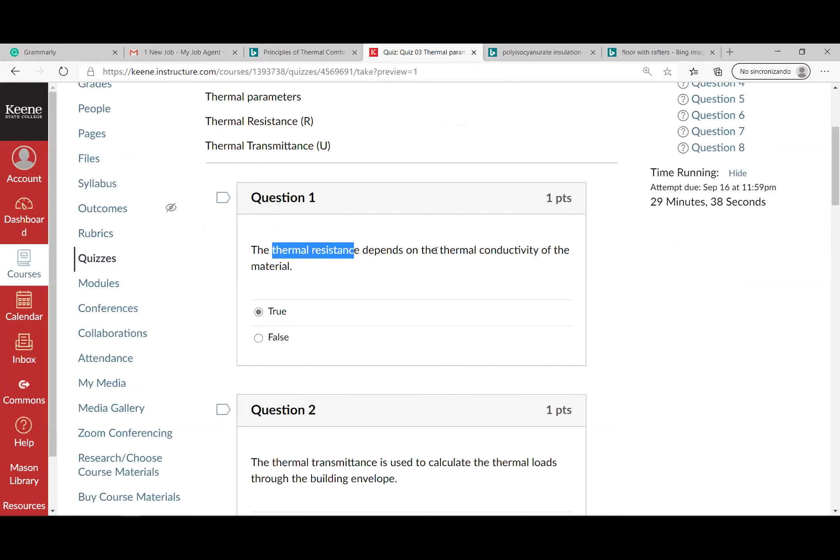Going over the quiz on thermal parameters. Okay, so let me look at it and we will solve all the questions. So first, question 1. The thermal resistance depends on the thermal conductivity of the material. Well, that's true. There's nothing to say about this. The thermal resistance depends on the thermal conductivity, and it depends on the thickness or the width of the material, but it depends on thermal conductivity.

Second, the thermal transmittance is used to calculate the thermal loads through the building envelope. Yes, so we use thermal transmittance, the U value, so that's true. Question 3. So here you have to type

Can you hear me, by the way? Yes. Yep, we can hear you. Okay. Rebecca, what's wrong? Or Scott, you can't hear? Okay, you fixed it? Yeah, probably there's something wrong with your computer. If you can't hear me, it's because you have muted your speakers or whatever, because my system is working. Okay, I'll continue.

Then here you are supposed to type a number. So if the thermal conductivity of a material is 5 BTU inches per hour Fahrenheit square feet, and the thickness of the material is 5 inches, the thermal resistance is, well, that's very straightforward because this is the thickness 5 divided by 5. So here you should type 1.

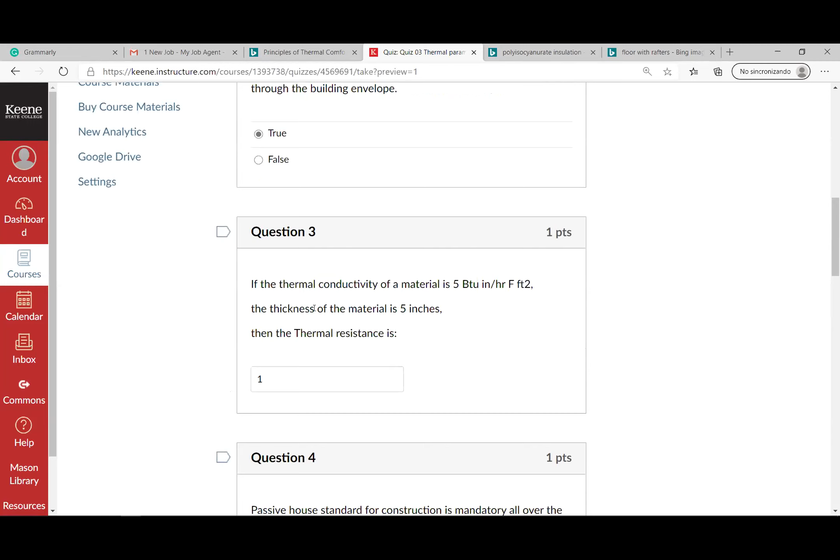And I think this is the question. Some of you might have, yeah, and that was my mistake, because for the thermal resistance, I think I should have added the units, but I added only the value itself. But next time I will add the units, okay? But here you just have to divide 5 by 5, so it's 1.

Question 4. Passive house standards for construction are mandatory all over the United States. Well, this is false. It's not mandatory. It's recommended, especially in cold areas of the United States, this is the recommended standard. But it's not mandatory. Okay, so there are things that are mandatory, there are things that are recommended. But we have to make our decisions.

So there are federal laws, the things that are mandatory all over the United States. Then there are state laws, things that apply only to the state we are living in. And then there are things that are not mandatory. They are recommended good practices of construction. And the passive house standards are one of the recommended things.

If I had to make a guess, I would say that in 10 years, that would be mandatory in cold areas of the States. I think passive house doesn't make any sense in Florida or in South California, so there should be other standards for those areas. But in cold areas, in north or northeast or northwest areas of the country, I think it makes sense.

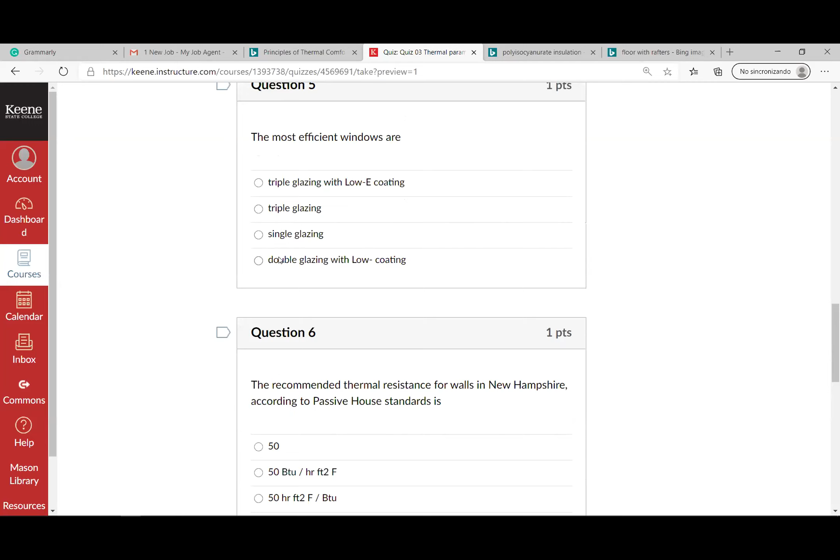Then the most efficient windows are, here we have triple glazing. Single glazing is not. Double glazing is not the most efficient one. So triple glazing with low emissivity coating is the right answer. What is the best one or the most efficient one between triple glazing and double glazing with low

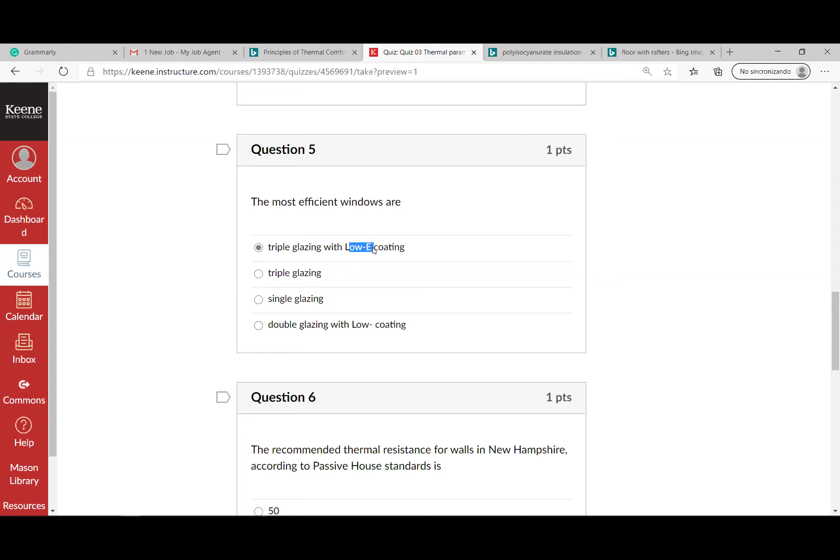emissivity coating? Well, I don't know. I need more information, but with this information, this is the most efficient one. Triple glazing is always better than double. And low E coating is better than not having a low E coating, low emissivity coating.

Then question 6, the recommended thermal resistance for walls in New Hampshire, according to Passive House standards, is 50, but then we need the units, okay? So the units for thermal resistance are this one. It's 50 hours square feet Fahrenheit divided by BTU. Okay, so 50 is not enough. It's not the correct answer.

And then which thermal insulation has the best thermal conductivity? When we're talking about the best thermal conductivity, we're talking about the lowest thermal conductivity. So in terms of thermal conductivity, extruded polystyrene is the best because it has the lowest thermal conductivity. Then there are other aspects like the life cycle, the CO2 emissions, and there might be other options. But if we only look at the thermal conductivity, extruded polystyrene is the best one.

Then what is the thermal envelope of a building? So here we have different definitions. Is it the area of a building between the basement and the attic? No.

No, it's not correct. It might be. So if you look at this, yeah. So sometimes it is the area of the building between the basement and the attic, if we don't have thermal insulation in the basement and we don't have thermal insulation in the attic. But if we do have thermal insulation either in the basement or the attic, this is not correct.

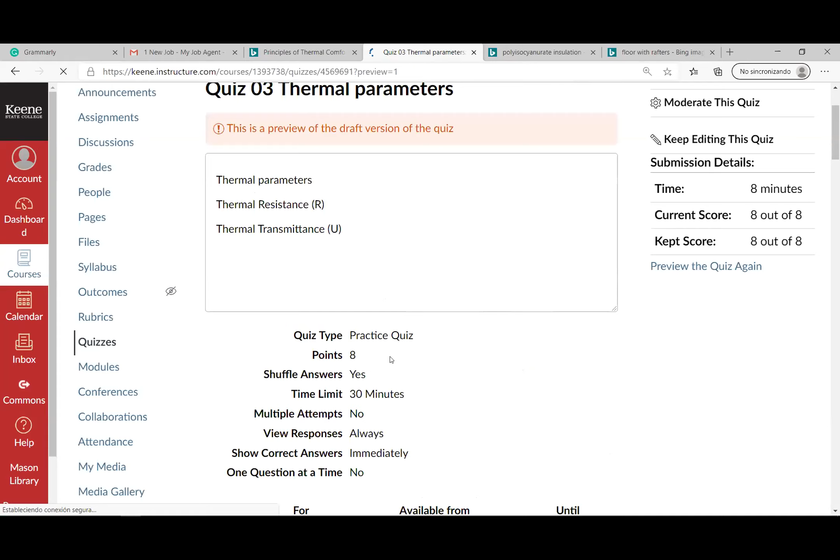So that's correct. So if I submit this, correct? Yes, okay. Everything's correct. So make sure that you submit all those quizzes. It's very straightforward, and if you make the wrong choice, you have feedback with the correct answer. It's just another way to take the attendance. You have to attend the lesson, and at the same time, you have to complete the quiz.

Okay, so Cyrus, are you there? Yeah, I'm here. Okay, let me.

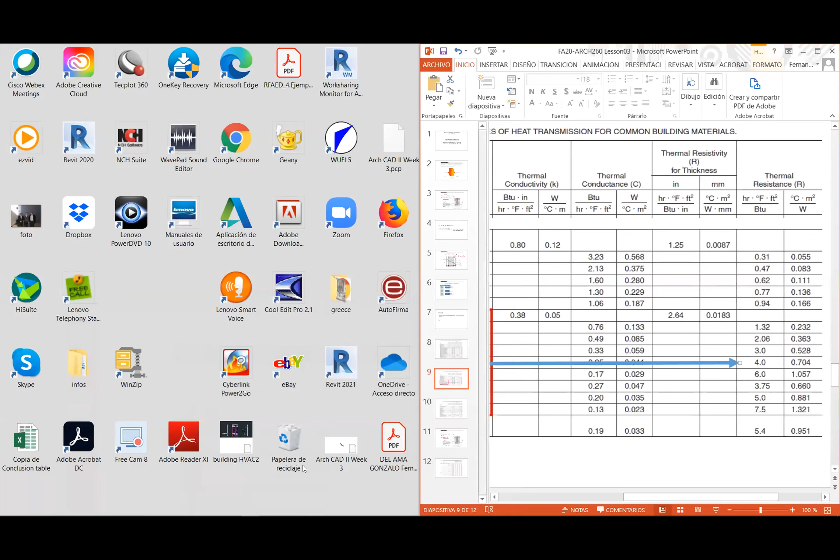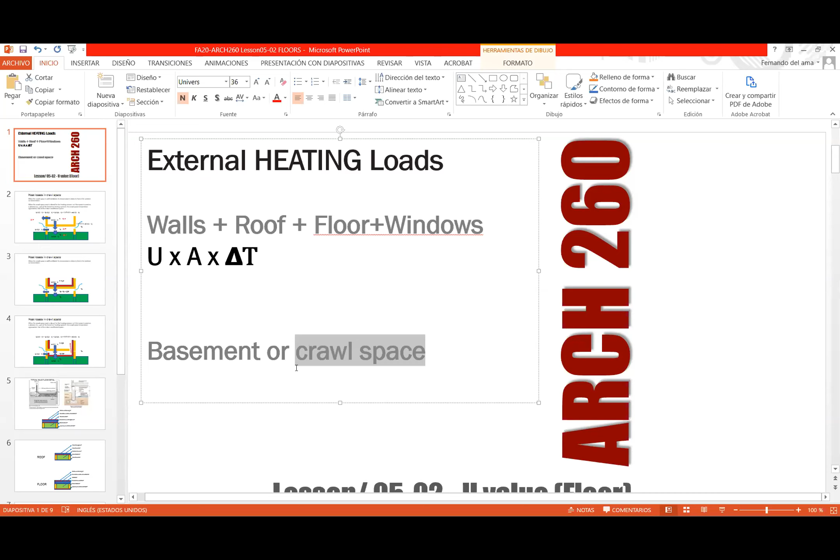Okay, so let's go over today's lesson. Today we're going to talk about heating loads. Finally we're going to calculate the heating load, which is the U value, times the area of the element, which can be a wall, a roof, floor, windows, whatever, times indoor minus outdoor temperature. Today we are going to look at floors, because floors are special, and we can have either a basement or a crawl space, or neither of them. So there are different options for floors. Let's start studying the options.

In single family houses, I think 90% of single family houses in the United States have either a basement or a crawl space. Basements are different because a basement is like another room. Usually we have basements with storage or mechanical rooms, so it's not a conditioned space. It doesn't have heating or cooling systems, but it's a place where people can stay. A crawl space is a very low space, like 2-3 feet, so people cannot stand in it.

And why do we need this? There are different functions. First, the crawl space provides us with protection from the ground, from the soil. In the soil we have a lot of things. We can have a rock soil, which is the best one, but even in rock soils we have moisture. For sure there will be moisture if it rains; the rain is filtered through the soil. We have animals, bugs, plants. So there might be a lot of things in the soil, and this is something that human beings have done throughout history.

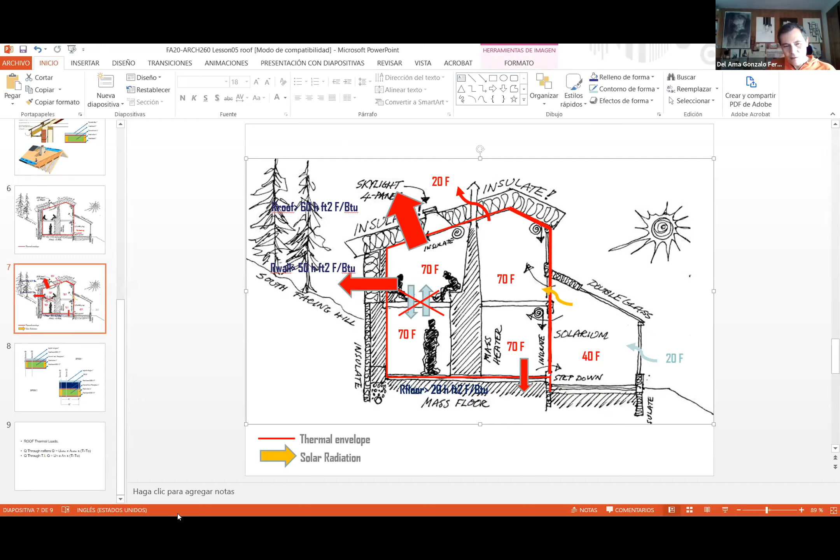But here, we can either place thermal insulation here, and this is the thermal envelope. You remember that we explained what the thermal envelope was. So in this case, if this place has a temperature of 40 Fahrenheit, that means that it's not a living room, so people are not living here. So the thermal envelope is this, and I have to place my thermal insulation where the thermal envelope is. So in this example, the thermal envelope is here. I have thermal insulation in the wall, and I have thermal insulation here in this floor.

And then I assume that the crawl space has the same temperature as outdoors, 20 Fahrenheit. Maybe this is not true. Maybe the temperature here is not 20, it can be 30, 35, 40. So we are overestimating the heat loss, because the thermal load here is the U value of this floor times the area of the floor times indoor minus outdoor temperature, 70 minus 20. So I know that it's going to be less. It's not going to be 70 minus 20. Probably it's going to be 70 minus 40 or 35. But I'm on the safe side.

So I know that my client won't have any trouble heating up that space, because I have overestimated the heat losses. So that's fine. If I want to be accurate and don't want to overestimate anything, let's solve this equation. But if I make that assumption, the thermal loads most likely will be lower than my calculations, so my clients will be comfortable there. We can either do this. This is what I recommend. I recommend you use thermal insulation here inside the house, because look, we have continuous thermal insulation, and this is always good.

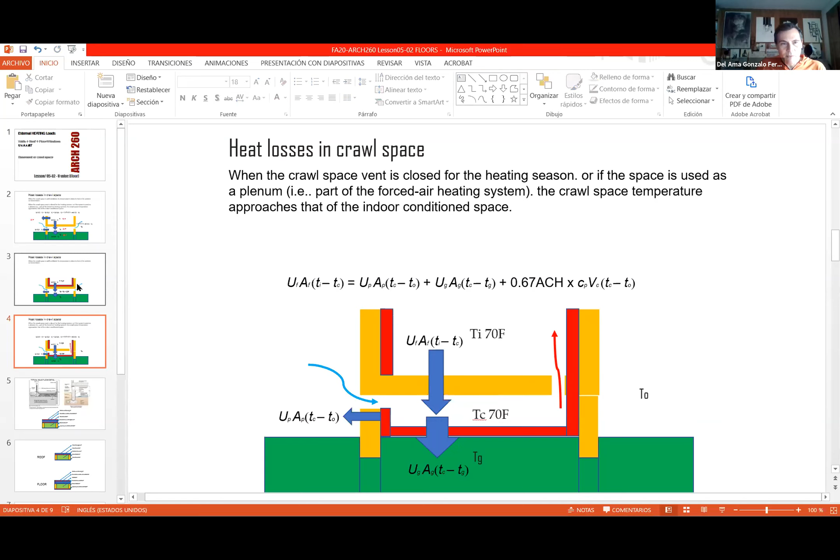Does it make sense? I don't think so. But there might be some times in which it can be reasonable. Anyway, this is my recommendation, but it doesn't mean that this is the truth and nothing but the truth. There might be other options, other solutions. So listen to other solutions or opinions. If it's reasonable, you can accept them. If it's not reasonable, go ahead with your own criteria. So we're going to do this because I'm teaching this course. I will use this option that I think is a good one. If it's not the best, I think it's good enough.

So that simplifies things a lot, because if I want to quantify the thermal losses here, I need to calculate the U value of the floor. We know how to do that. I need to measure the floor area. It's very easy. And then I only need to know the indoor minus outdoor temperature. So I don't need to calculate that crawl space.

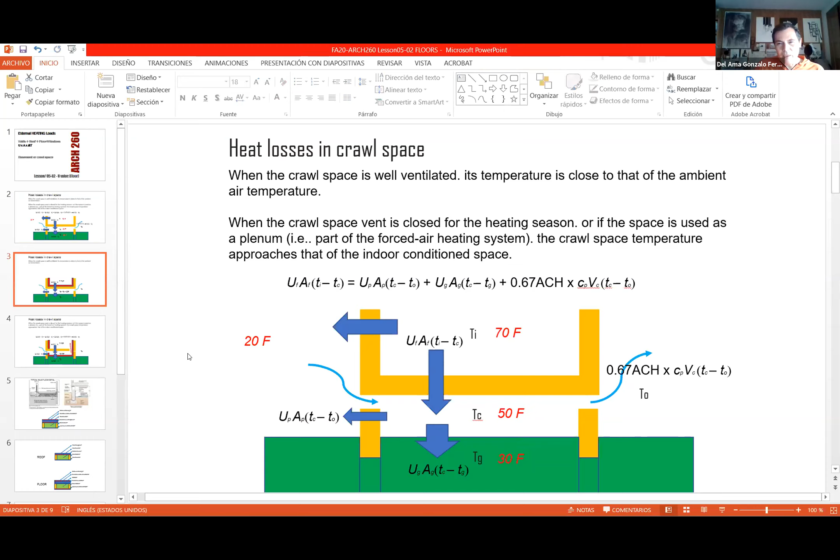With this equation, I need to calculate the crawl space, and I need to know the ground or the soil temperature. It's more complicated. Probably it's more accurate, but it's more complicated. And I think this assumption is good enough because we are on the safe side, because we are overestimating the heating loads.

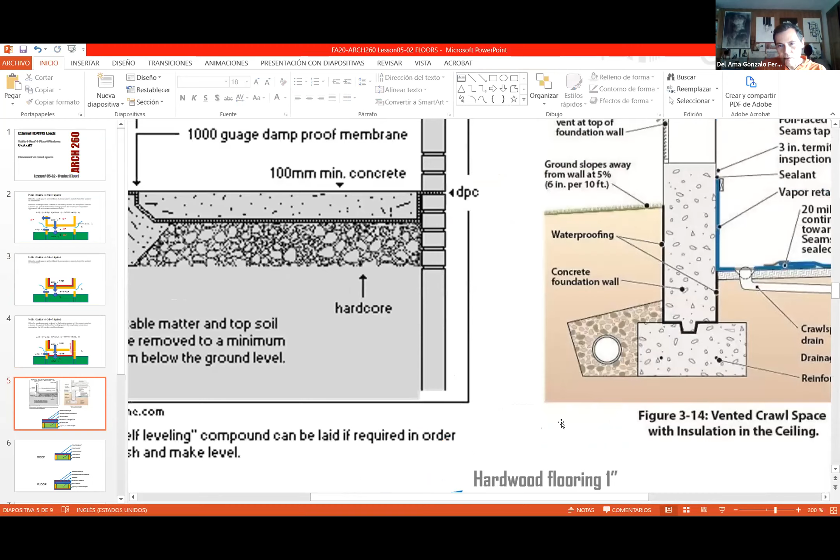Okay, so now we have to analyze details. So if you remember, there was a book I recommended, one of the recommended books in this course. It's the Builder's Guide to Cold Climates. So this detail is taken from that book. So this is the book. And if you look over that book, you will find that there are a lot of details, like this one,

with crawl space. And it's very useful because here we are analyzing only materials from the thermal point of view. But in this book, you will find that there are other aspects of building construction that we are not analyzing in this course, like waterproof layers, or how we deal with moisture. So we will learn this in other courses, especially in Building Science 2. But in this course, we're only dealing with thermal transmittance, thermal resistance, thermal conductivity, the thermal aspects of those buildings.

But I think it's good going over those details, because there are a lot of details here, and if you find those details in that book, that means that they are good details that you can use. You can copy and you can use. Okay. So I think it's good having this book, because there are things. Look at this detail. There is a lot of information here.

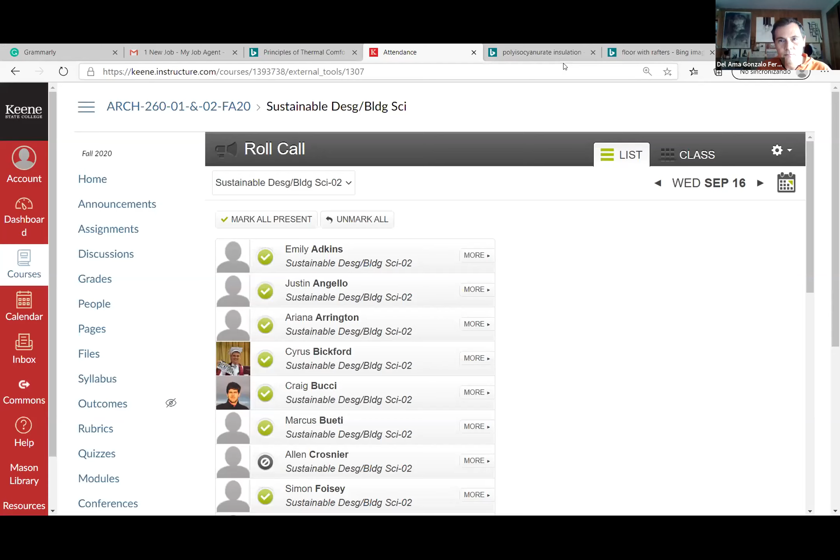But here, this material, this polyisocyanurate, okay, this is a waterproof material. This is a thermal insulating waterproof material. So if we Google this, okay, this is the polyisocyanurate insulation. Well, it's foam. It's a rigid foam board insulation, and well, it's something that can cope with water. Okay, so it's something that doesn't get wet inside because it has a

closed cell rigid foam. I don't know if you have studied chemistry. If you haven't, it's something amazing. But this closed cell foam or polymer means that we have cells like this. So we have atoms of materials creating those closed cells. And if it's closed, that means that a molecule of water cannot enter inside this closed cell. Okay, so the material itself is protected against water.

If we have an open cell material, that means that water can flow through that material, so it doesn't protect the house against water. Okay, so when we want to protect something against water, we can use this foam, and foam is better than fiberglass or fiberboard. Those are not closed cell materials. So if we really want to protect things against water, we have to use this foam. But we can have an open cell foam or a closed cell foam. So we can use that, and that's it.

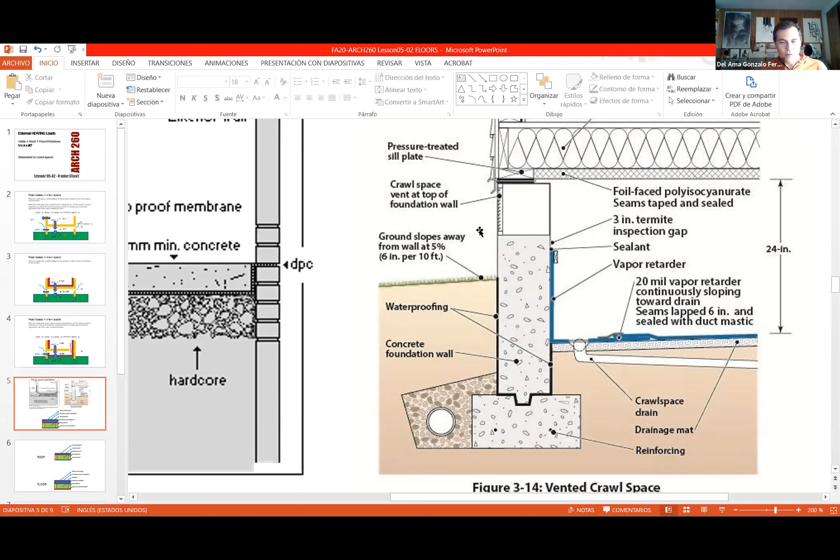And with that book, you will learn not only things we are studying now. We're studying the thermal properties of materials, because this drain doesn't have to do with thermal properties of materials. This is to get rid of water. Yeah, we have to do that, but this is not building science. This is construction. Okay, so with that book, you can learn building science, and you can learn good construction solutions or details.

Okay, so let's look at these two details. Here we have the crawl space, and here we have a floor without the crawl space. Is it acceptable? You might find people that think that this is a good solution. Well, I wouldn't do that in living spaces. Okay, if we have a house with a living room and a bedroom, or we have a commercial shop, or a theater, or other commercial buildings, I wouldn't do this where people can stand.

I can do that, for example, in carports. So in carports, I don't need a crawl space, because there will be a car here, there won't be people, so we don't need comfort conditions where the car is, or a storage room, or a mechanical room. Okay, so if I have rooms where people are not living, I would go for this solution because it's cheaper.

And we have a waterproof layer here. So if we protect this, we won't have issues with water. Here we have aggregates. Okay, so this is a concrete slab, and here we have aggregates. Aggregates have a function; we will explain that in another class, maybe not today. But this is a good detail with aggregates, a waterproof layer, and then a concrete slab.

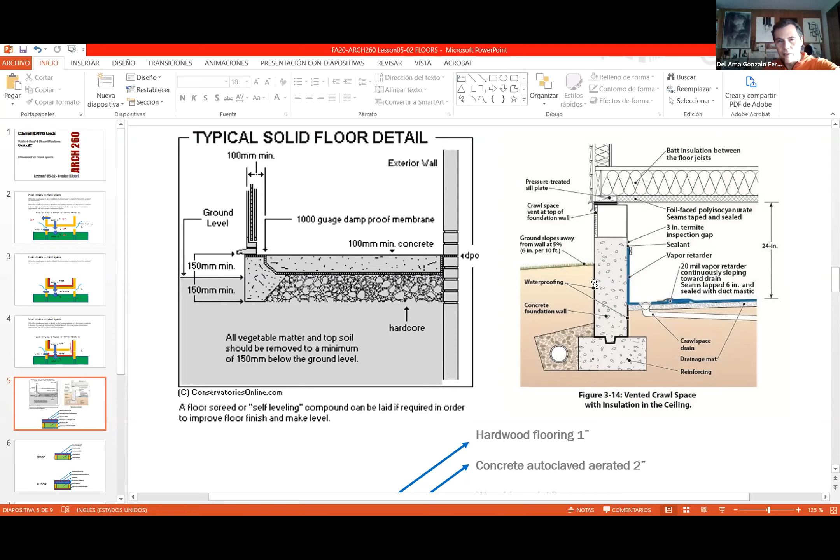We would have a wall, a concrete wall. If we have a basement, most likely we will have something like that. We'll have the aggregates and another concrete slab here. So here we have directly the soil. We don't have another concrete slab there. Okay, so I recommend you this detail.

And then if we analyze the materials, thicknesses and different layers that we have in a floor, this can be something good. In this kind of construction, there will be rafters and thermal insulation in the middle, the same thing we saw last Monday on roofs. In the roof we have rafters, the structural elements, and then thermal insulation. In the floor, we will have the same structure: rafters, 2x4 or 2x6, 16 inches apart. The width of the rafter is 2, so 14 between the faces of two rafters. Those dimensions are standard.

But the difference is that this is outdoors. So we have to use this polyisocyanurate board, let's say 3/4 of an inch, because we need to protect this from moisture and water. This is not an OSB board or plywood. It has to be polyisocyanurate because it needs to be waterproof. Then we have rafters and thermal insulation, let's say fiberglass. And then we can have a wood board, let's say OSB. 1 inch is too much; let's say half inch.

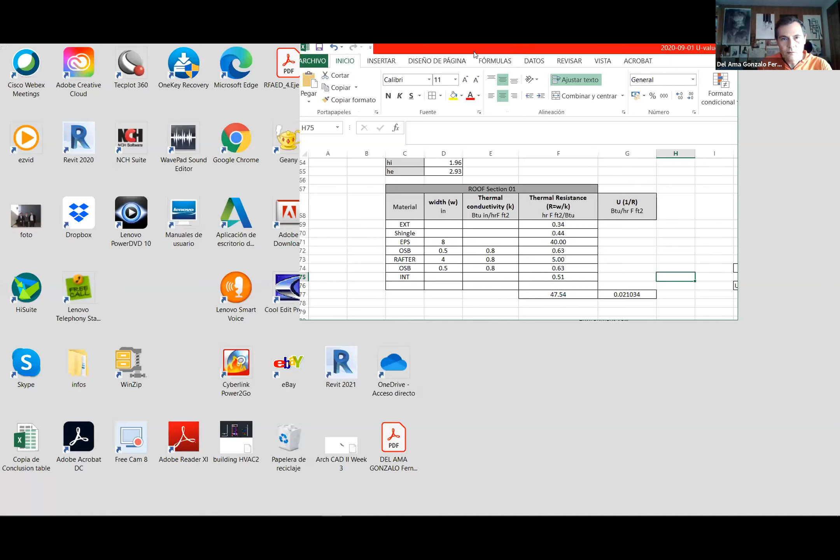But we do have 2 different sections. We have a section through the rafter, and we have another section through the thermal insulating, in this case fiberglass. So we are going to calculate this. I will place this here, and I'm going to open the Excel file. There we go. And this is the roof. This is the floor. Okay. So I'm going to delete this.

Well, the most important thing is that you have already worked with this Excel file, and we'll keep on using this file to carry out the final energy analysis of a building. Okay, so what we are going to do now, I'm going to copy section 1 and section 2. So I select this, I copy, then I paste it. And this is not a roof, this is a floor. Section 1 through the rafters, okay? And then there's another floor here. Section 2 through the fiberglass.

Okay, so now we have to change materials. So the first thing, if we are analyzing floors, we have to be careful because this is inside and this is outside. In these tables, we have placed the exterior at the top of the table. This is good for roofs because in roofs, this is what happens. But in floors, I would do the other way around. So this is ext and this is in, because here we are inside and we go down and we are outside. So I think this is clear.

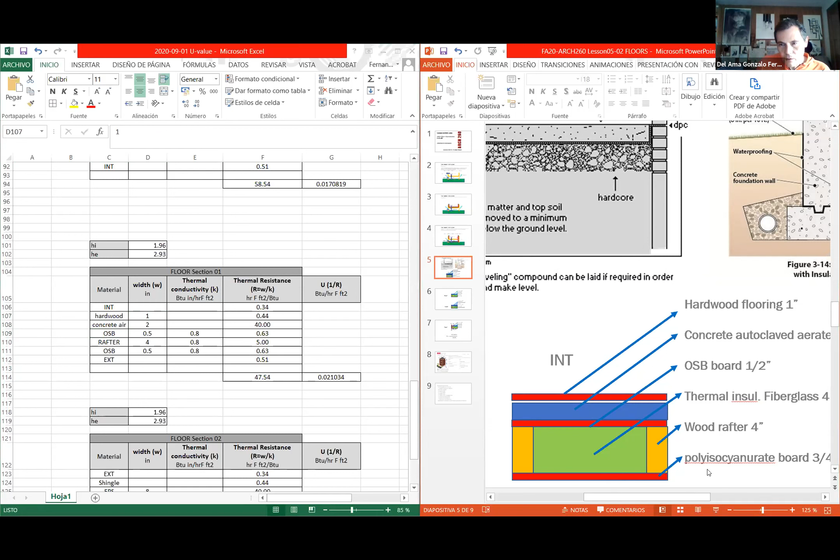This concrete, yeah, it's 2 inches here. Then we have the OSB, ½ inch. And then we have a rafter, and the rafter is 4 inches. So it's the same thing we had for the roof. But now we don't have another OSB.

So this is the polyiso, whatever. Yeah. And this is 3 quarters. So the thickness is 0.75. It's 3 quarters. Okay, so we have materials, and then we have the width.

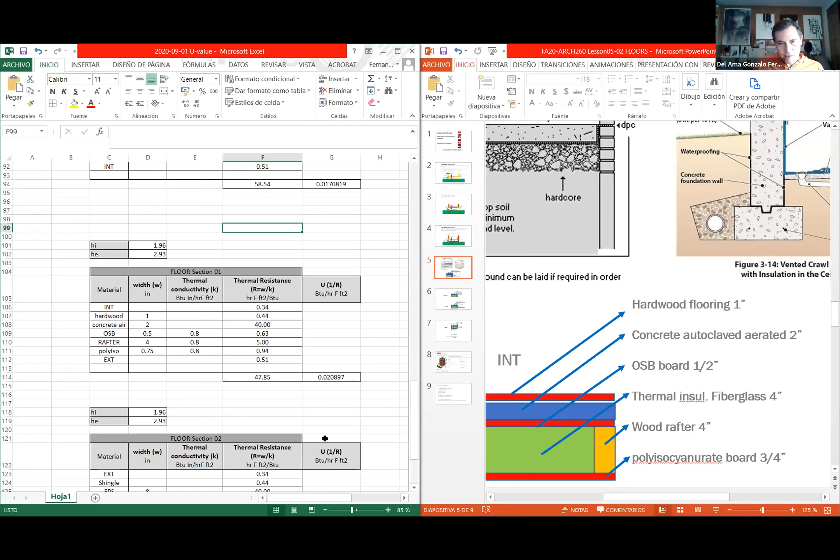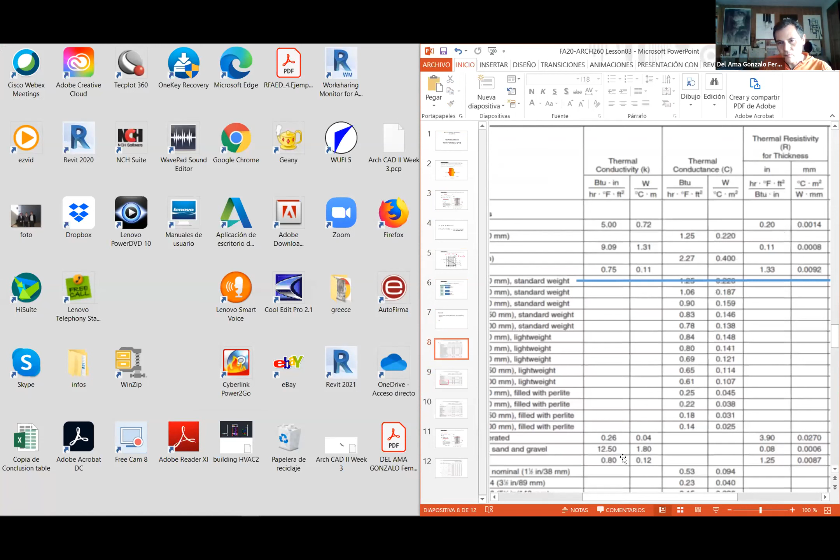Now we have to look at the thermal conductivity. So we have to open lesson 3 again. That one. Okay, so we have these tables. So on lesson 3, we have to find the materials we're working with now. The first material is the hardwood. Here we have the softwood, I think in flooring. Yeah, so here we have flooring materials, and we have a hardwood flooring. So the hardwood thermal conductivity is 1.1.

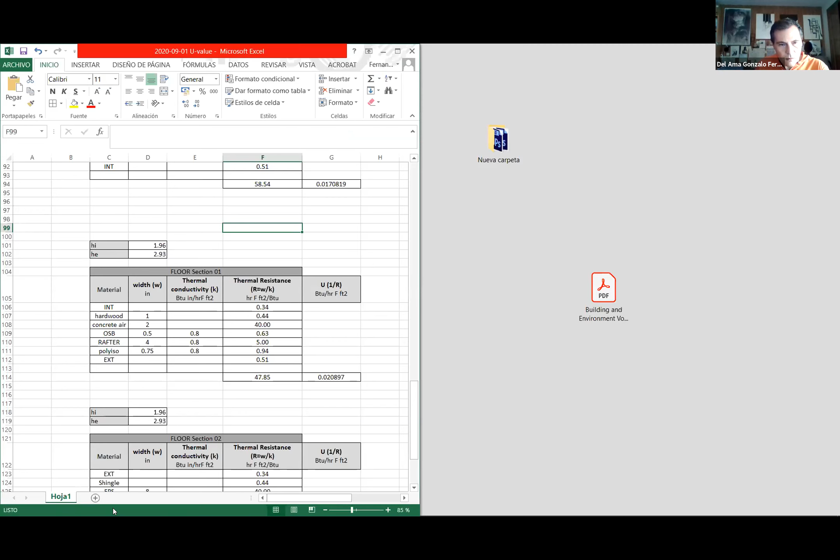So I can open again the... there you go. Okay, so the hardwood thermal conductivity is 1.1. I'm going to delete this because I think it's confusing. Okay, so hardwood, an inch, 1.1 thermal conductivity. Then the concrete, aerated, whatever. So we have 2 inches.

Do we have that material? We should, yeah. So you see that this is the concrete autoclaved aerated. So this is 0.26. We do have a thermal conductivity here. So this is 0.26. The next one is the OSB board. I think it's here. Yeah, so this is the OSB, and the thermal conductivity is 0.8. So this is 0.8.

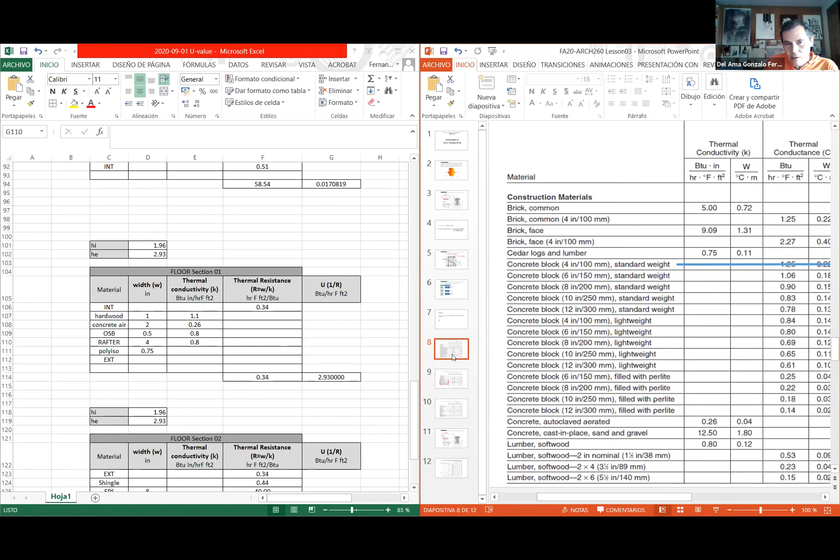Then we have the rafter. The rafter is softwood, and we do have the thermal conductivity here, it's again 0.8. And this is the polyiso, whatever. I think this is a thermal insulating material, so it should be here. Yeah. So this is the polyisocyanurate. And as you can see here, we have 3/4 of an inch. So the thickness here is 3/4.

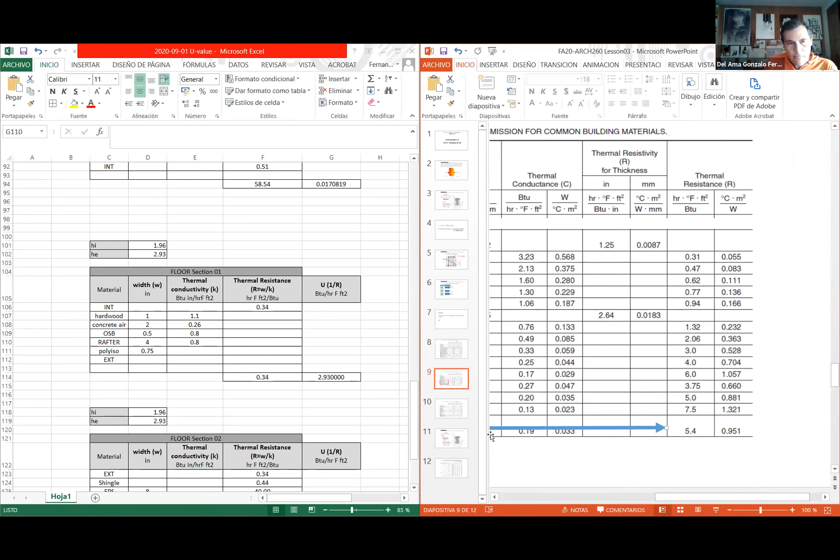So we have to just go to the thermal resistance column, and the thermal resistance is 5.4. So we don't have thermal conductivity here, but we know that thermal resistance is 5.4. Okay, are we done? Not yet, because look at this. Now we have the thermal resistance of this indoor air layer and the outdoor air layer. But this has changed as well.

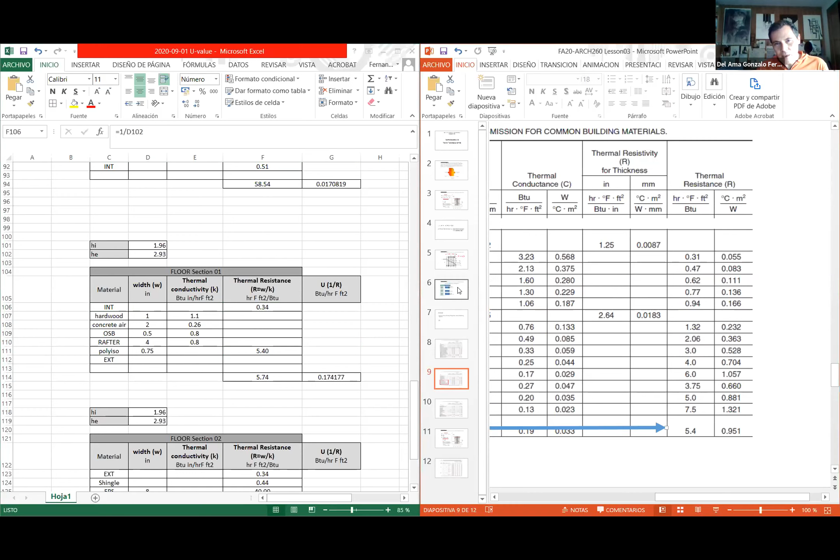So on this same lesson 3, I have to go to a different slide because we need different coefficients here. That was the coefficient for walls, that was the coefficient for the roof, and now this one is the coefficient for the floor. The floor means that the heat flow is going down. HE is 2.93. It's always 2.93. But HI is 1.05. So here I have to type 1.05, and here 1.05.

Okay, so now this is the indoor air layer. If I type this, there's a mistake because now it's outdoors. So I have to select this, and now it's this cell. It's 1 over HI, this one. And that one would be equals 1 over HE. There you go.

And what about this? The thermal resistance is always the width, this one, over the thermal conductivity, that one. I click OK. Then I drag this down, 1, 2, 3, 4 cells, and I have all these thermal resistances. The total is the sum of all these values, 20, and the U value is 0.0478. So this is section 1 through the rafters.

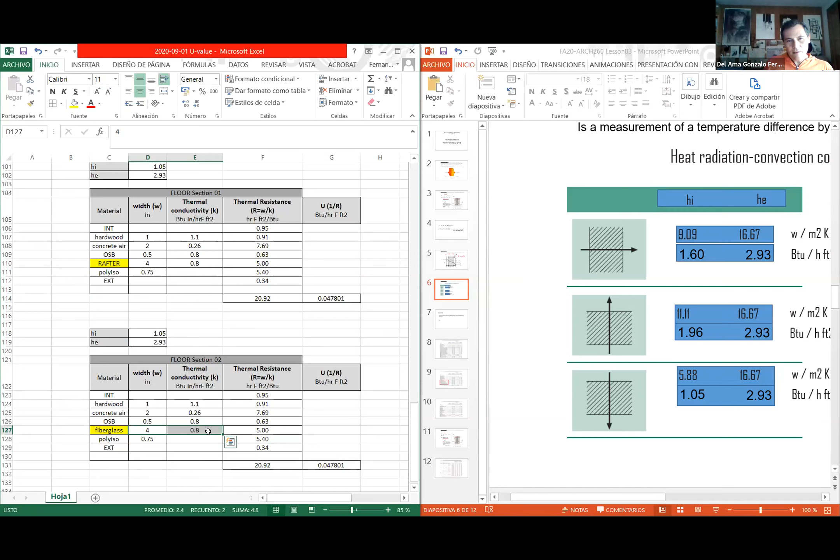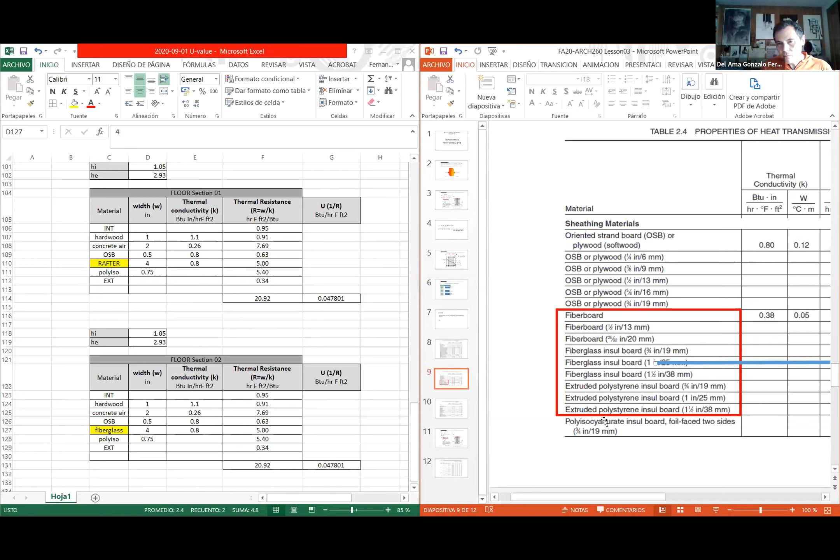And what is the thermal resistance of fiberglass? I have to find out. So this is fiberglass, 1 inch, is 4. If I have 4 inches of fiberglass, I don't have thermal conductivity, but I know that this is 16. There you go. So now the thermal resistance of this section through the fiberglass is 31, and through the rafters is 20. And then I have the thermal transmittance, the U value here. Okay.

I'm speeding up things because we have seen that before, and I'm not explaining this too much because we are using the same table and the same Excel file with the same thermal resistance, the same U value. If you don't understand, or you want me to slow down or repeat anything, just let me know. Do you have any questions so far?

Just say yes or no. No. Okay, thank you. Not really. Okay, if you have any questions, do not hesitate to interrupt me or write a chat or whatever, and if it's necessary, I will repeat everything again. Okay.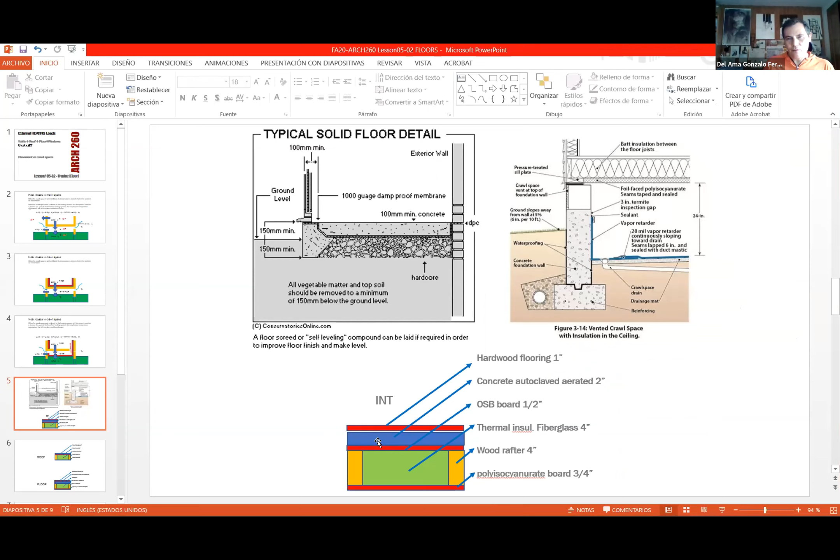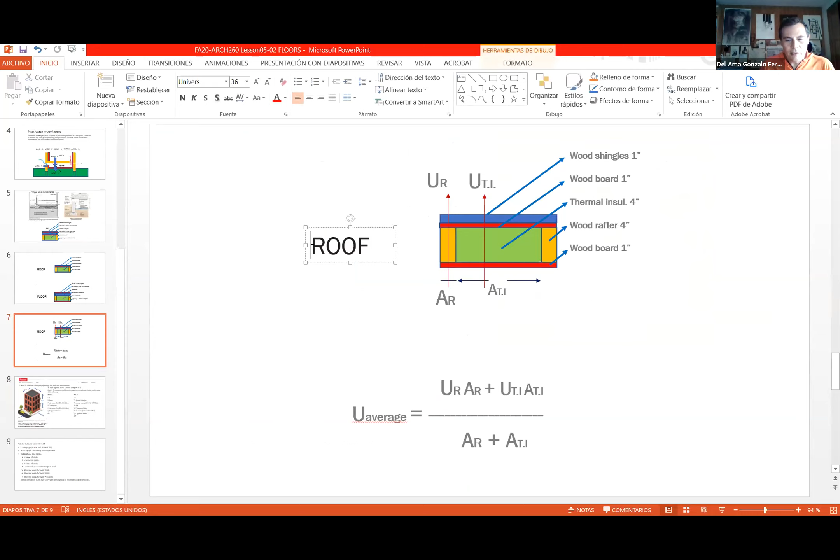What's next? If you look at the lesson today, that one. Okay, we have talked about the details, and now we have talked about materials of floor. So the last slide is this one. This can be the roof, or it can be the floor, the same floor or roof. We're just working with different materials. It can be a wall as well, because in walls we do have studs. We have a structural element and we have thermal insulation in the middle. Okay, so we can have exactly the same issue. We can have the two different materials in walls.

Okay, so when we analyze a part of the building envelope, walls, roofs, or floors, and we find that there are different materials, then we need to calculate the U value of this material, and then we have to calculate the U value of this section, two different materials. And I remember that someone asked me, when we want to calculate the thermal loads, what do we do if we have two sections? We have rafters and we have fiberglass or thermal insulation. Does it matter? And I told you, yeah, it matters.

And today we're going to explain the procedure or method that ASHRAE is using. So we are going to explain that first, because ASHRAE is telling us to use that method. And if ASHRAE says something, ASHRAE's wishes are our commands. So we have to do that. But on the other hand, it's easier. Even if ASHRAE didn't say that, I would use that method because it's easier. So I'm going to explain the method, and then we will see how or why it is easier.

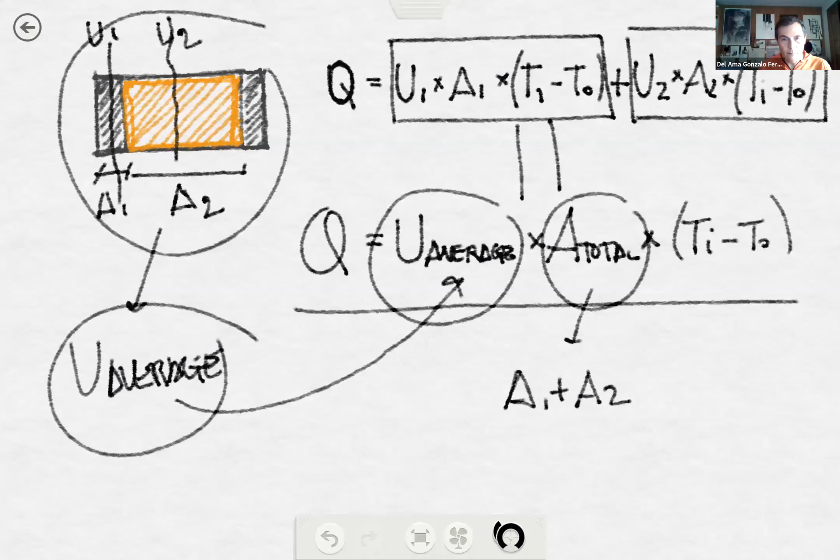Okay, so now I have to change. Okay, do you see a different screen now? Yes. Yes. Okay. Perfect.

Okay, so I'm going to explain this because I think I need to draw this by hand instead of having the picture there in PowerPoint, because I think it's clear. First, we're going to analyze this. It can be a roof or a floor. So there will be rafters. Okay, so those are wood rafters, softwood. Okay, and now we have a thermal insulation between these two rafters. So this is the hatch of thermal insulation.

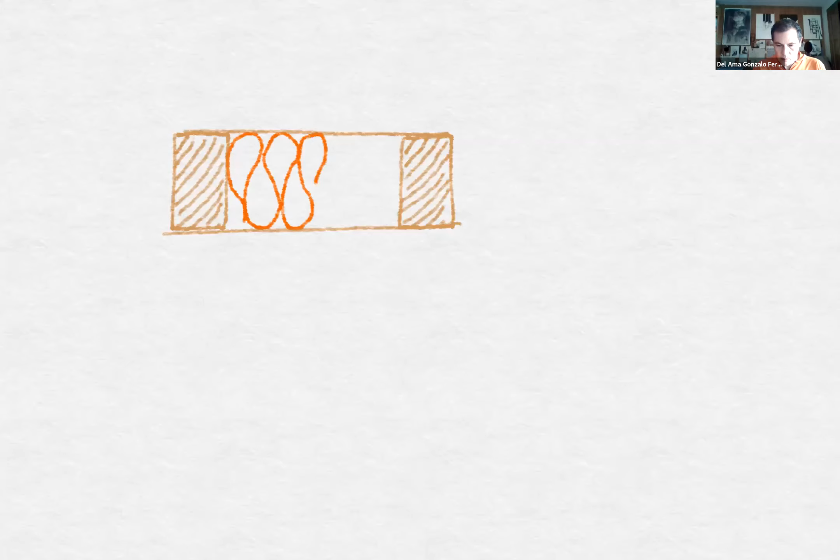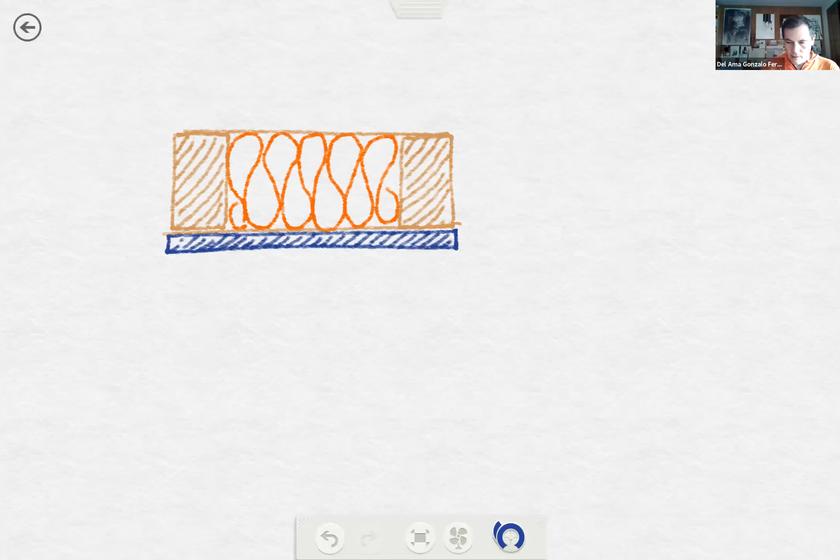Okay, then we have boards, and we were using this board here, and that was the polyisocyanurate or whatever. Okay, so we need to protect the thermal insulation and the wood structure from the water. And then above this, we had another OSB board. Okay, this is the OSB board.

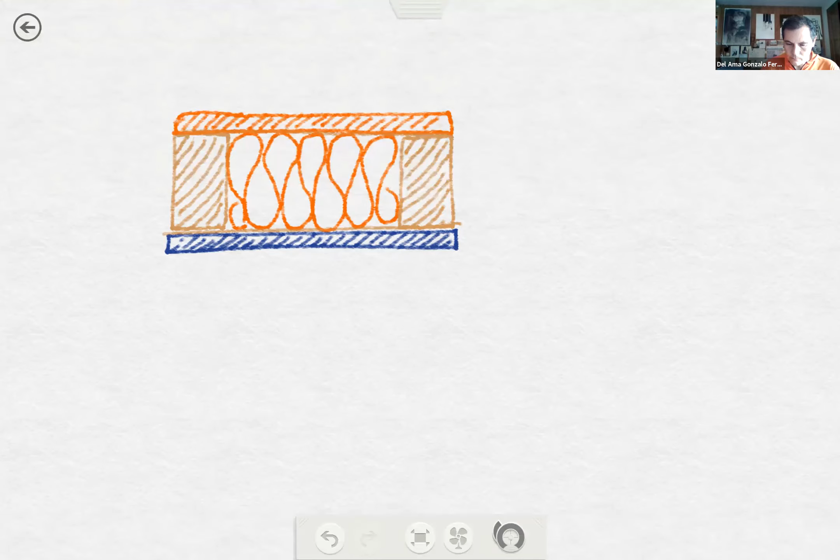Then we had this concrete layer. Concrete. And finally, we had the hardwood flooring. Or tiles, I don't know, we had the flooring material. Okay. Now we need to include more details. This is the sketch, but now we have to give more details.

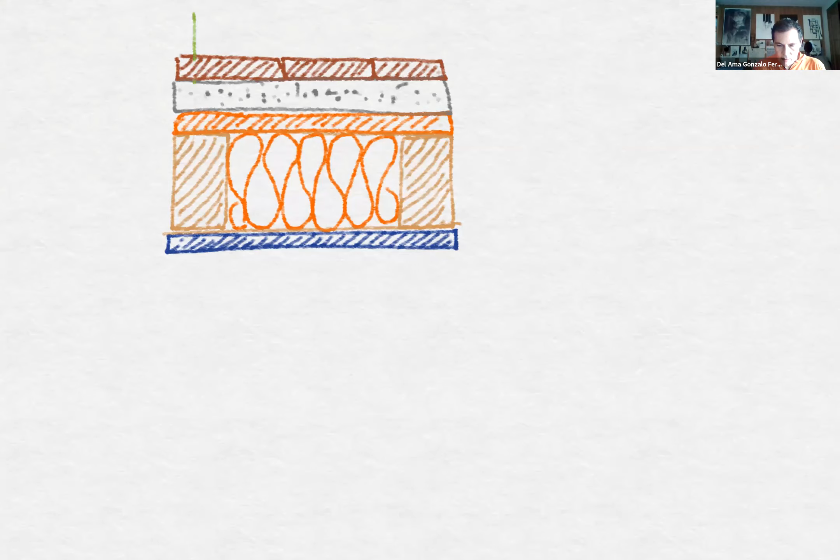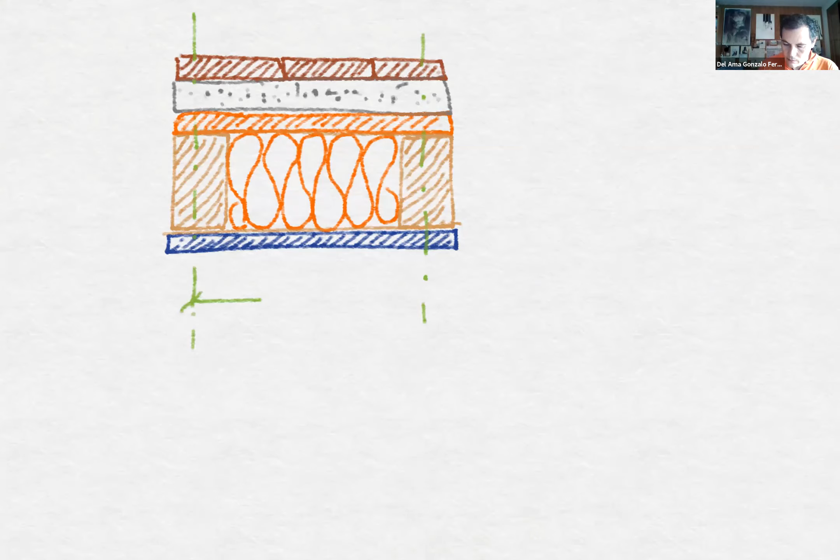Usually, when we have structural elements, it's a good thing using axes. Okay, so just in the middle of the structural element. So the structural element here is the wood rafter. So just in the middle, we have the structural axis. And then we can take measurements between two axes. So the distance between two rafters, I think we agreed that it was 16 inches. Okay, this is what we agreed.

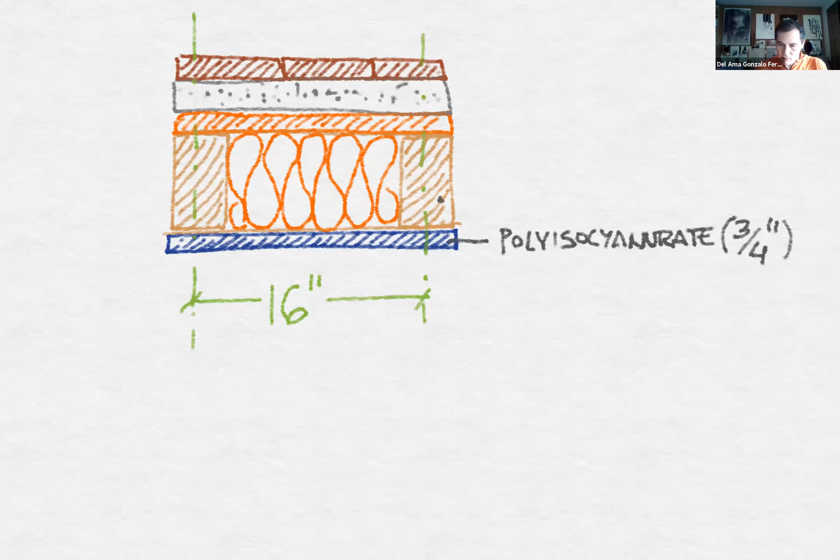But we do have other elements, so we need to work with names. Okay, so we have to write down names of the materials that we are using here. So this material is the polyisocyanurate. Great. And it was 3/4 of an inch. Then this material is the softwood rafter.

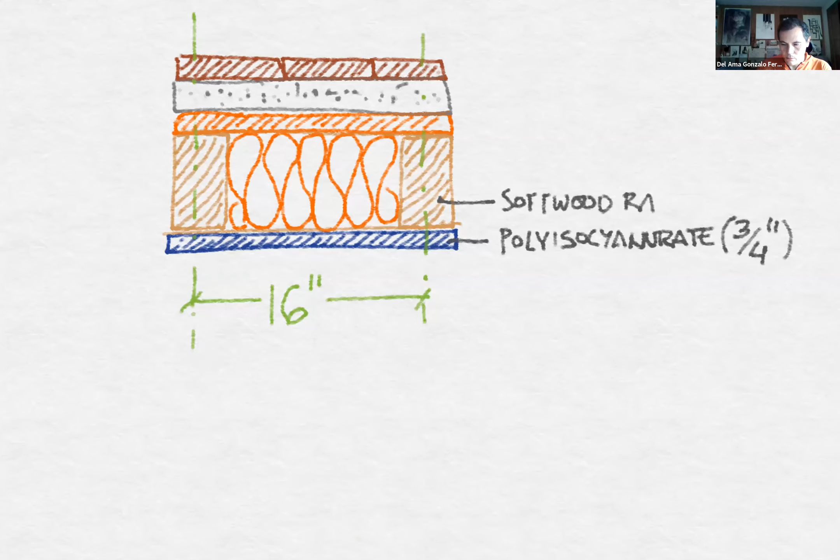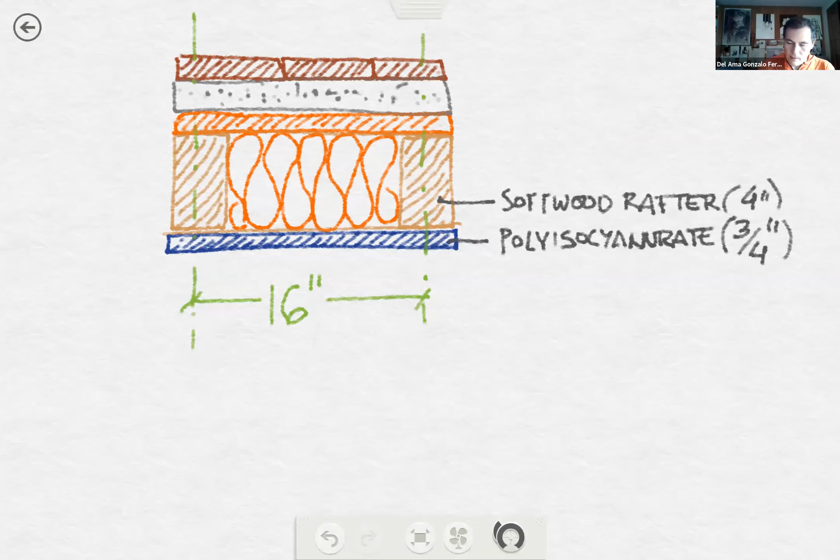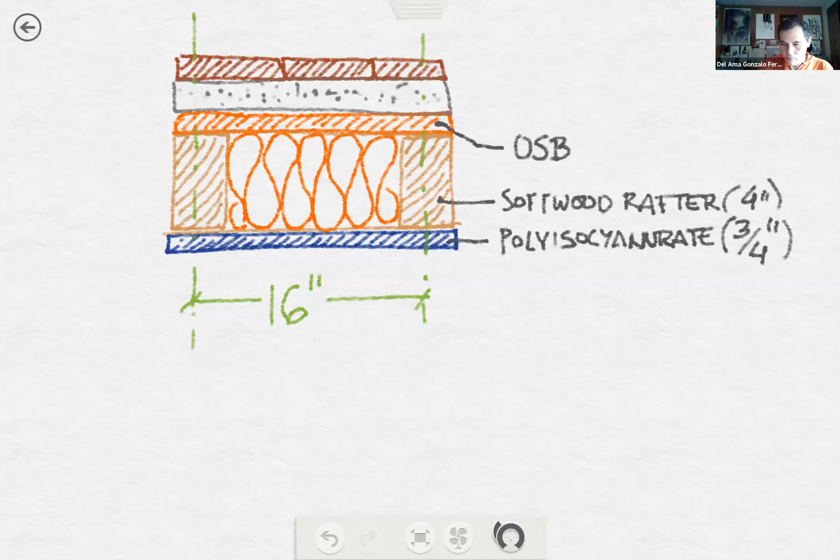And it is 4 inches. Then this material is the OSB board, and it was 1/2 inch. This material is the concrete, and it was 2 inches. And finally, we have the hardwood flooring.

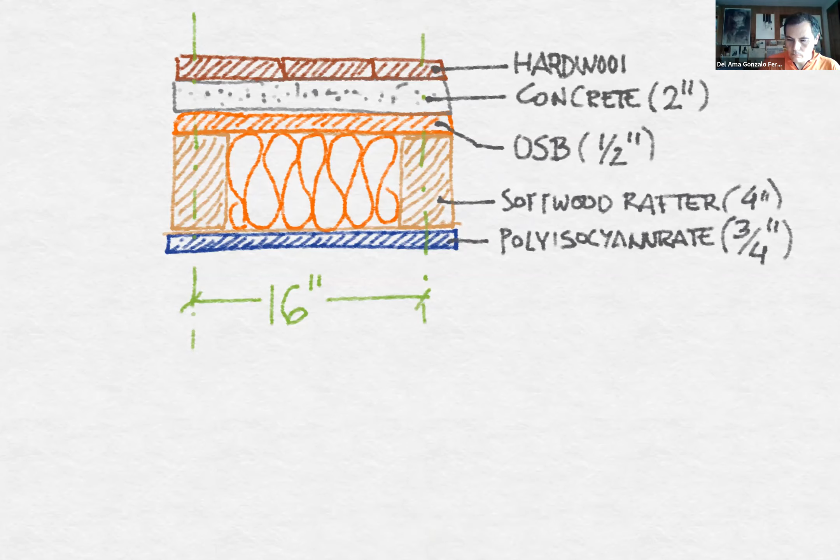And that was 1 inch. Okay, so that's a good way to define a detail. Okay, so here we have a lot of information. First, we have different materials with different hatches. And here we have the name and we have the thickness of different materials.

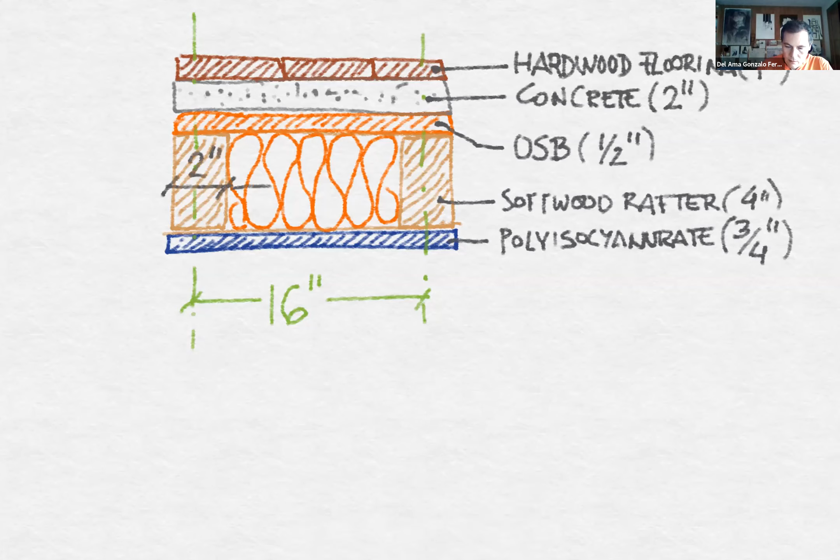Second, we have this relevant information about the distance between two axes. We can have one more. We can add this because the width of this is 2 inches and the width of this is 14 inches. Okay, so I think this is all we need to work with this and to explain what I'm going to explain now. Well, finally, there's a U value through the rafters, and there's a U value through the thermal insulation. We have already calculated it.

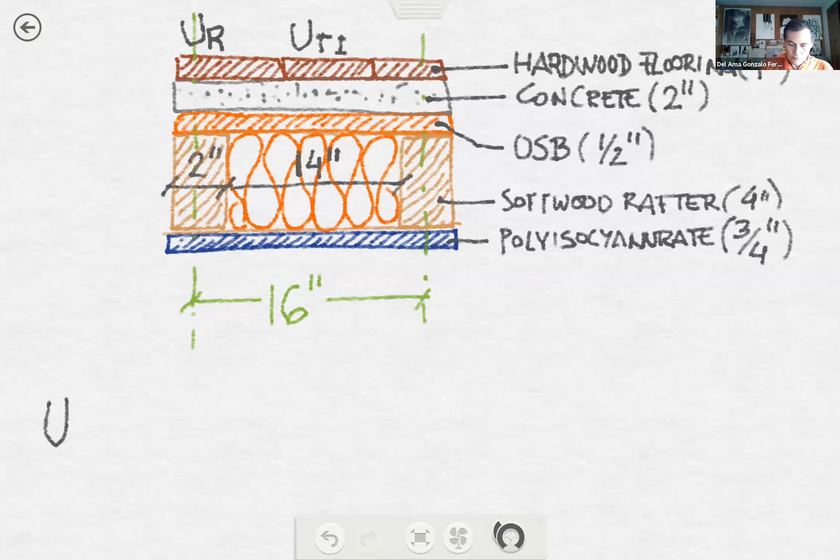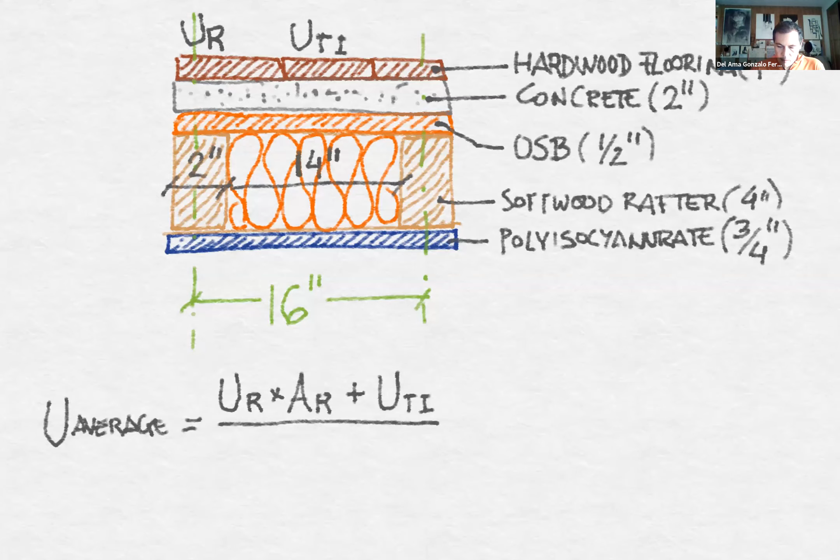Okay, so now what we are going to explain is the concept of the U average. U average equals, first, we have the U value of the rafter times the width, or let's say A, this dimension of the rafter, plus the U value of the thermal insulation times the area of thermal insulation, divided by dimension of rafters plus dimension of thermal insulation.

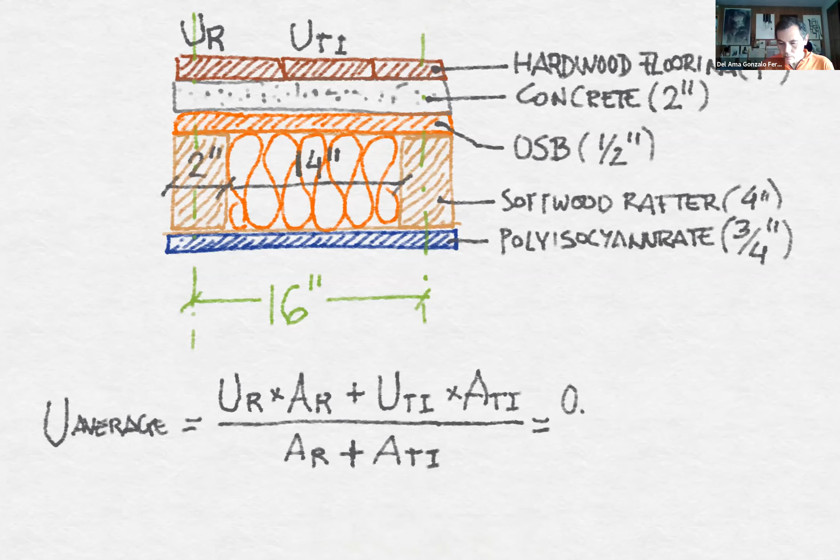Okay. In the example that we are working with, the U value of section 1, it was 0.048 times what is the width of a rafter? It was 2 inches, plus the U value through the thermal insulation, it was 0.03 times the width of this element, which was 14, and this is divided by 2 plus 14.

Okay, so this is the concept of U average. And why is it important? Well, because by doing this, I don't have to calculate the total area of rafters, the total area of thermal insulation. Okay, if I have to calculate the thermal load, it is the U value of the rafter times the area of the rafter times indoor temperature minus outdoor temperature, plus the U value of thermal insulation times the area of the thermal insulation times indoor minus outdoor temperature.

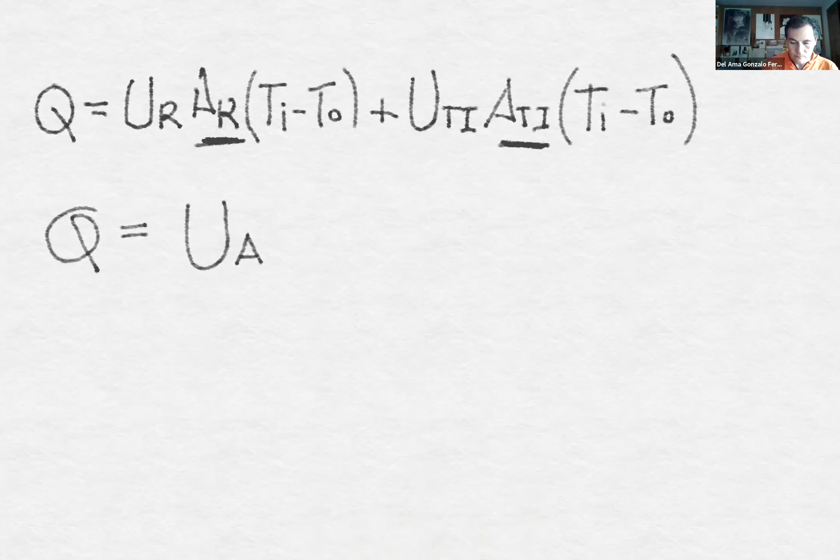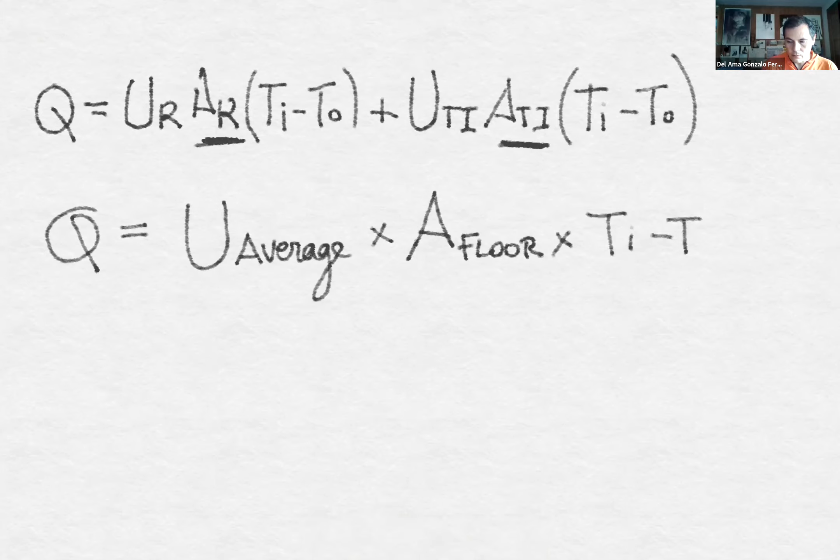Okay, but here I need to measure this and I need to measure that. And it's not just measuring the proportion, because I have 2 inches and 14 inches. That's fine. But what if I have 132 rafters? It's crazy. So if I know the concept of the U average, I can calculate the same thermal load, and it will be the U average times the total floor or roof area times indoor minus outdoor temperature.

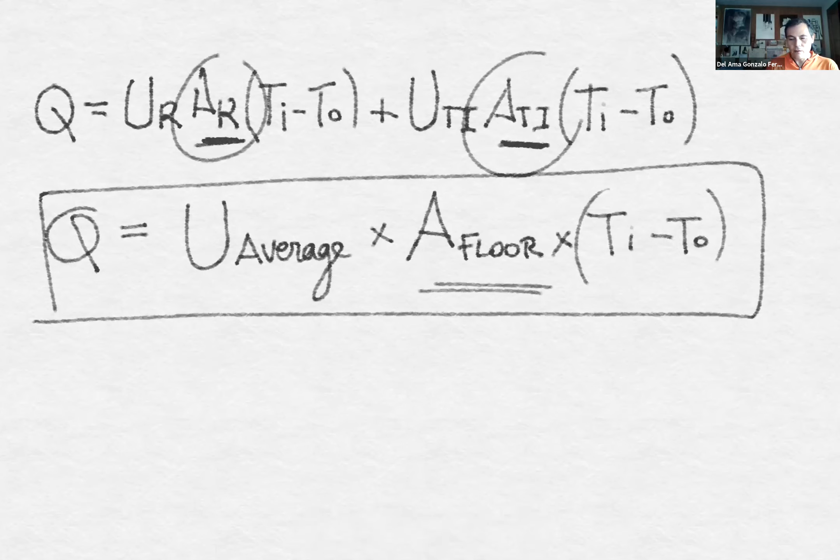Okay, so this is easier because I don't have to measure all the rafters, all the spaces between rafters. I just have to measure the floor area. So width times length, and that's it. And the U average, yeah, I have to make one more formula, that one, but that's a piece of cake. Okay, so this is what I mean with the U average, and it's something very useful.

So I will stop sharing this and I'll start sharing that. Okay, so that's the idea. I have the U average, and I can do this with the Excel file. Okay, so on the Excel file, I have prepared these two cells here. So I can say that this is the floor and this is the U average value.

And what is the U average value? Okay, so I need a formula, and this formula is going to be more complicated than the formulas we were using, which are something divided by something or something times something. Here we have to use brackets because we have to work with that formula. So I can type here equals and two brackets. So the first one is the U value of the rafters, so that cell, times the thickness or the width of the rafter, 2,

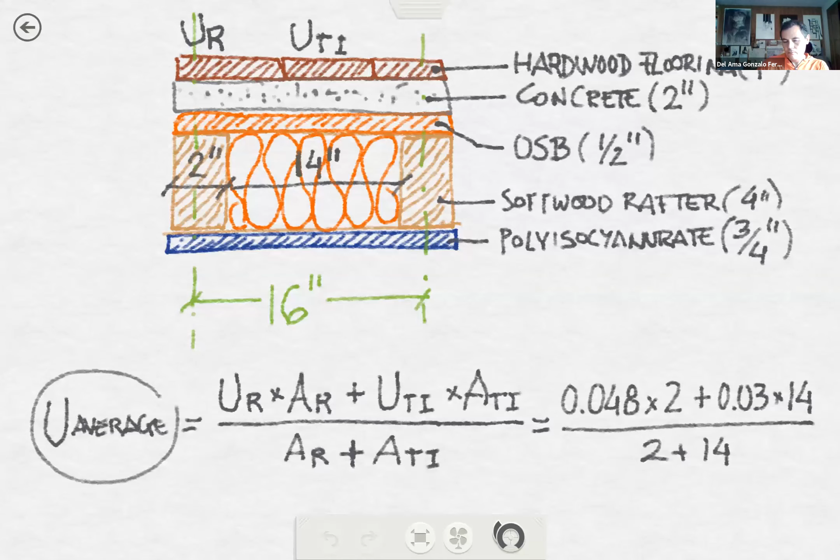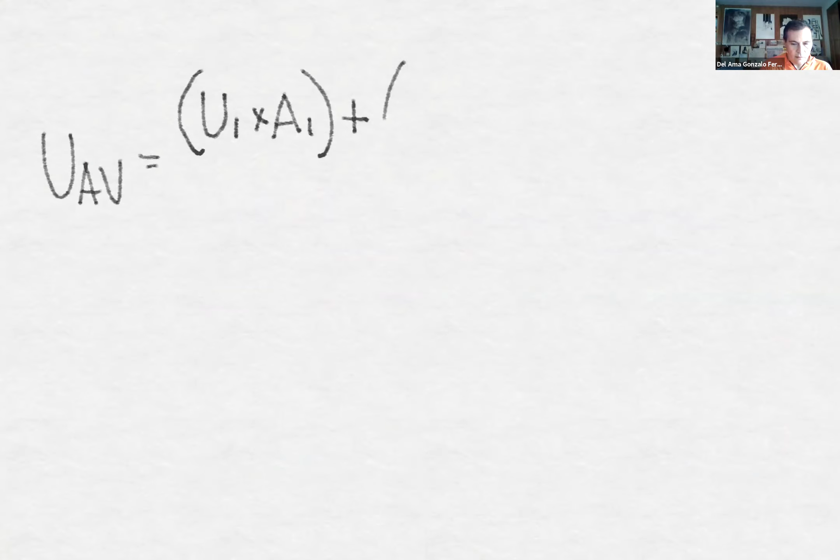Okay, so we are calculating the U average. So let's open the file. So the U average equals, and I'm going to write down the brackets here. So this is U1 times A1, bracket, plus U2 times A2, bracket, and then I have to divide this by A1 plus A2. If I translate this to the Excel file, I have to type equals

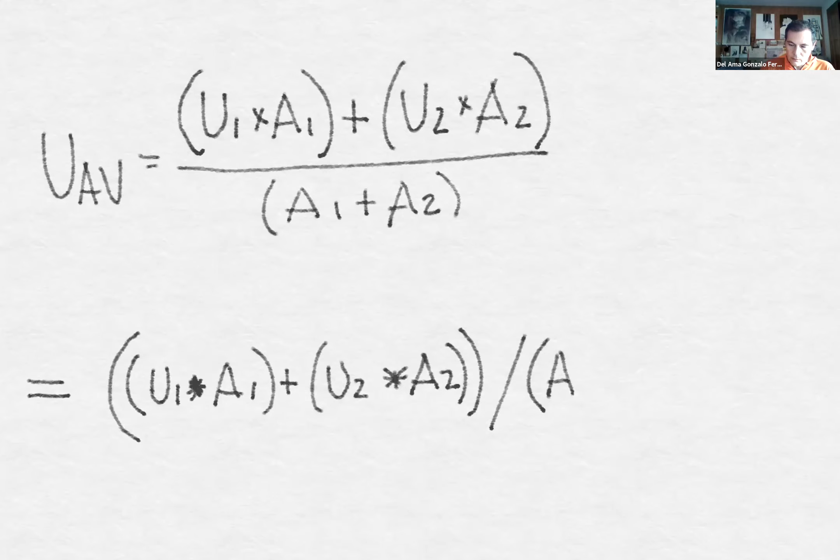bracket, U1 times, which is this, A1, plus U2 times A2. We need another bracket here, divided by bracket, A1 plus A2. Okay, so this is the Excel formula.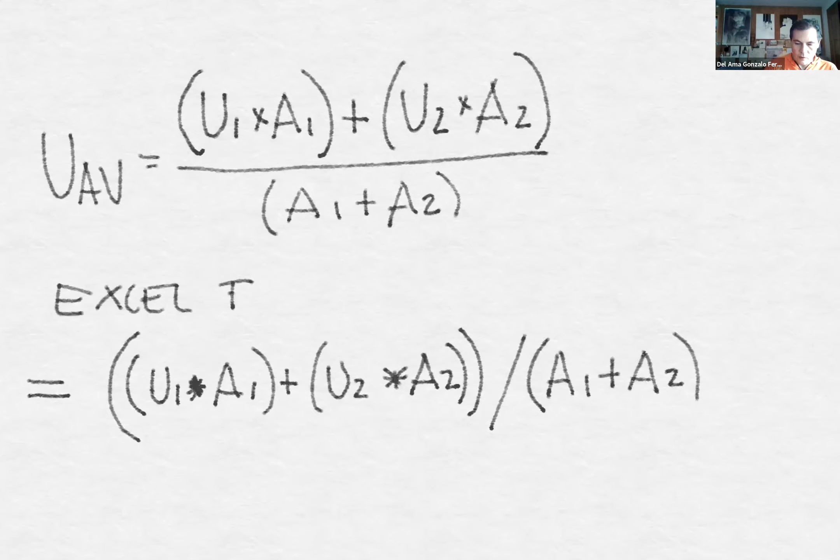So this is how Excel works. And you have to be careful with brackets, because if you miss one of the brackets, everything will be a mess. Okay? So that's why the first time it's good using a calculator, so you can use this value from the calculator, and if out of the Excel formula you have the same value, that means that it's correct.

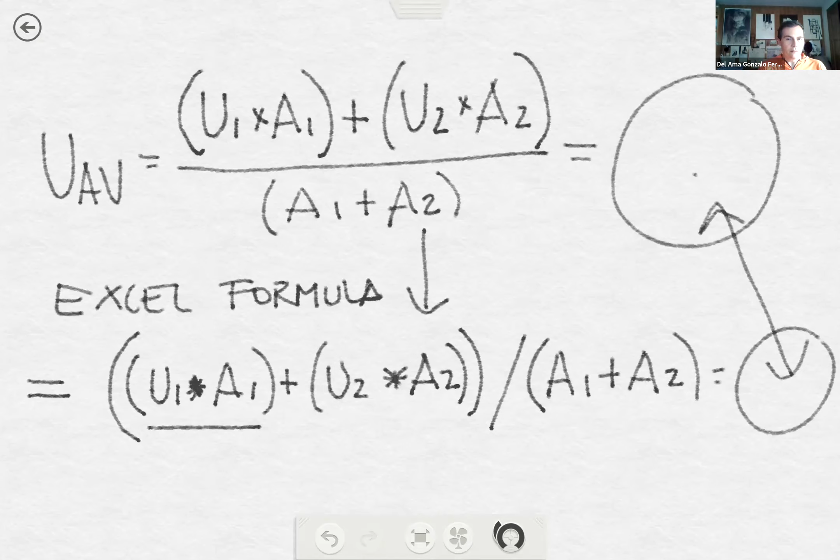Okay, but if you want to work with Excel, you need to know the Excel language. So the Excel language is that between brackets you have this. If you want to add up something, you need two more brackets. And if you need to divide this, you need two more brackets here. So that's why when we were working with that formula, if I type here, I see all these brackets here.

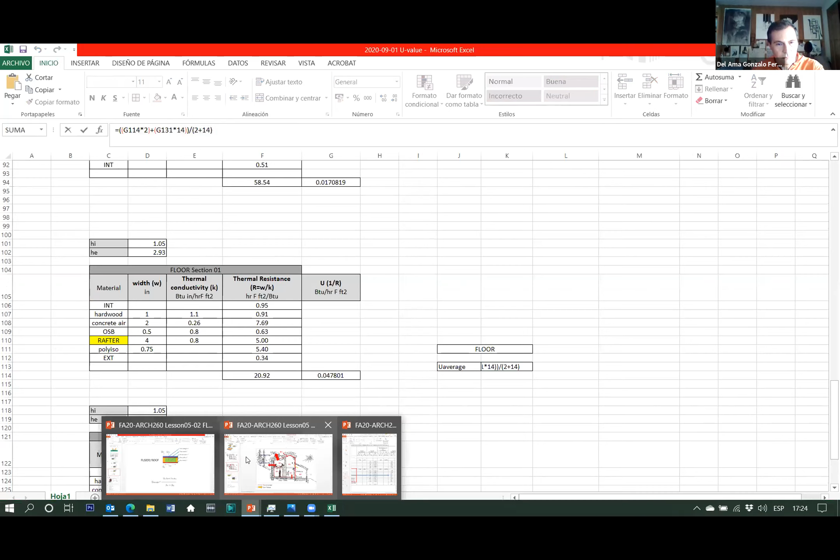There you go. Okay, so this is one cell. This is U1 times A1, U2 times A2, divided by A1 plus A2. This is the Excel formula, which is the same as this one. Any questions about the Excel file?

So the Excel, as you can see, is getting more and more complicated. We started with the wall, and now we have walls, floors, or roofs, with two different sections for roofs. We have floors with two different sections, and every time we have, imagine, section 1 and section 2, we have to calculate the U average. So somewhere here, you have to calculate the U average.

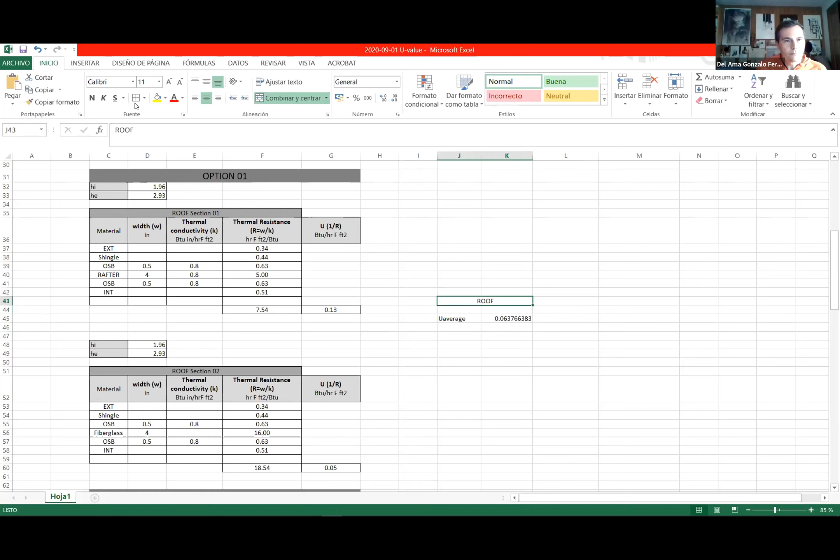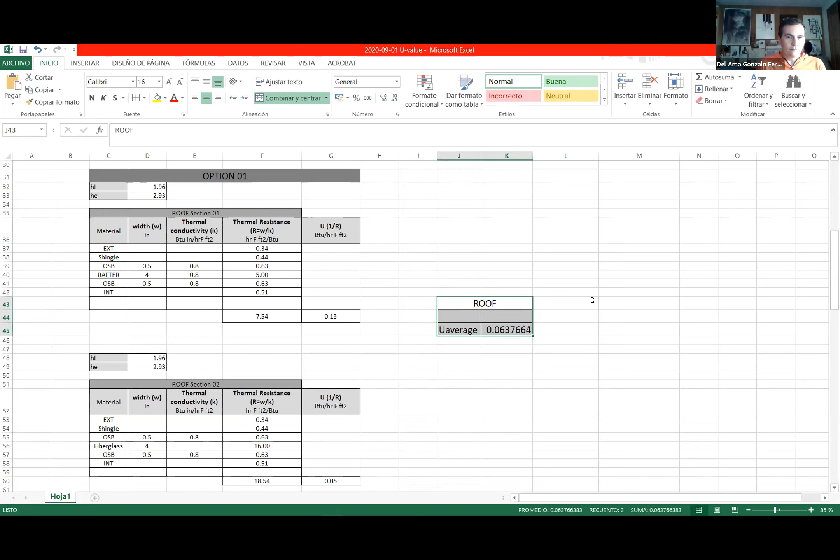Okay, so this is 0.06, that is closer to 0.05 than 0.13, because again, this is 14 and this is 2. Okay, so when we are studying a detail with two different sections, with rafters and thermal insulation, make sure that you always end up calculating the U average. If we know the width of that material and the width of the other material, then we can calculate the U average.

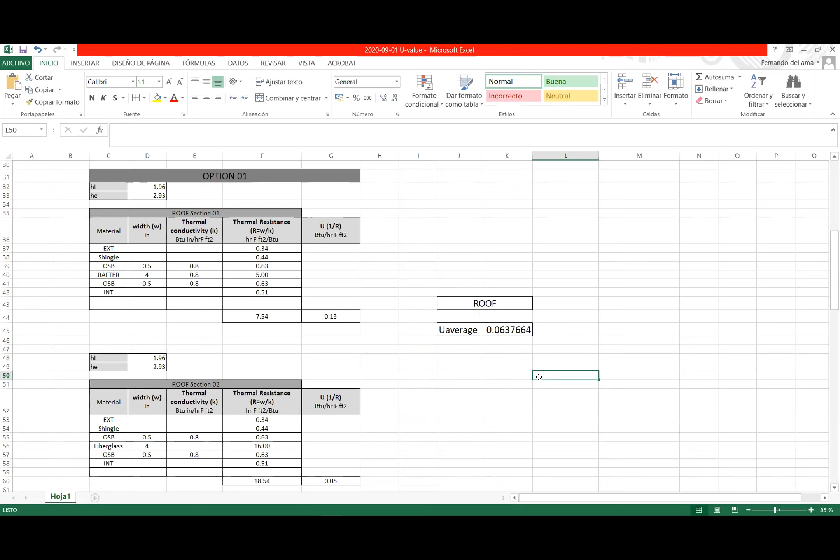Is it clear? I think so. Yeah, it's okay. I hope. Anyway, I'll find out if it's clear or not, because now you have to work on your own. I've been working for 4 hours today. I'm exhausted.

From now until next lesson on Monday, I have prepared another assignment that you have to work with. At the end of this lesson, you have the assignment. By the way, that will be part of the midterm assignment. The midterm assignment will be made of different classworks or assignments that we're going to make from now until a couple of weeks. In a couple of weeks or 3 weeks maximum, we will have the midterm exam, and you will be giving your midterm presentation.

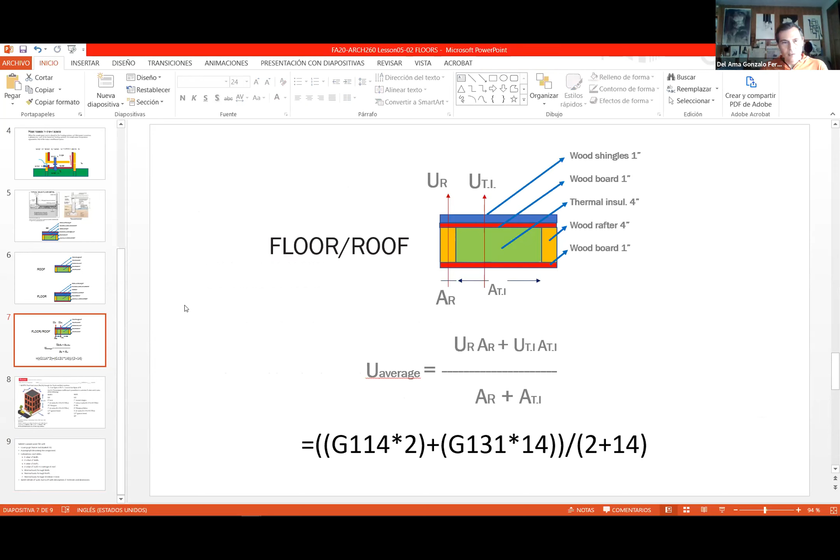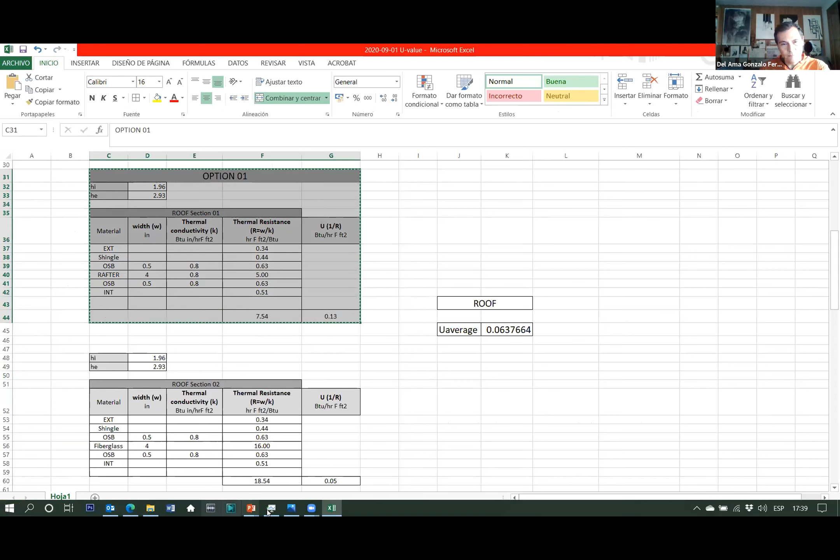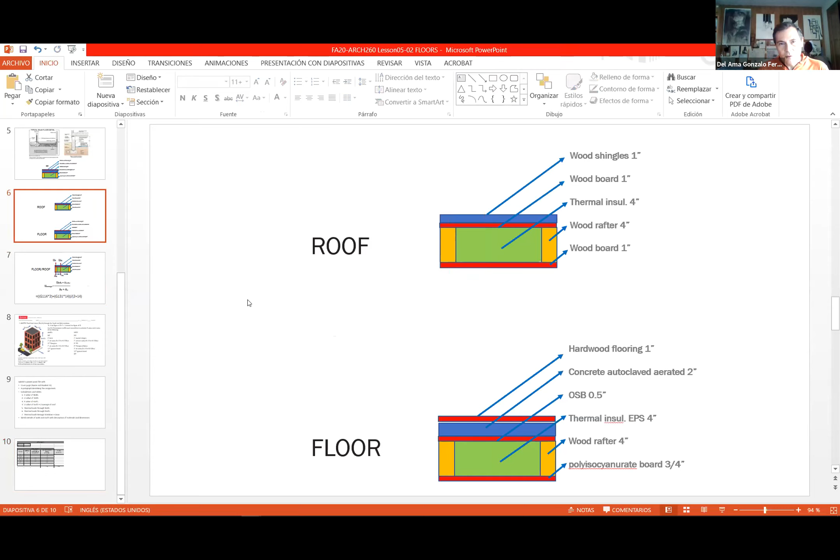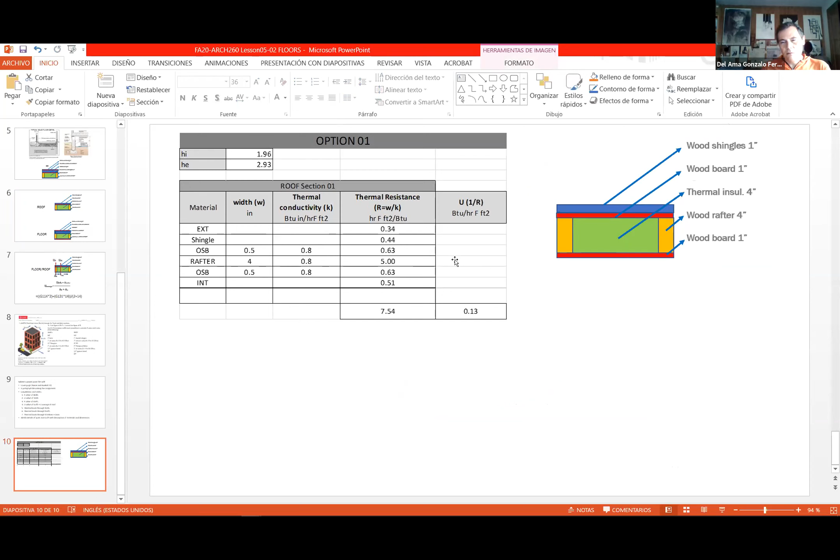And that's it. But now you have to submit a PowerPoint file. It's not the Excel file. You need to submit a report. So you can use the Excel file. You can copy this Excel file on the PowerPoint. And this can be, you type here. Okay, so this can be a page or a slide of your report. Okay, so if you're analyzing the roof, this is it. Okay, and if we need to calculate the U average, that would be the U average. So that could be a slide or a page of your final report.

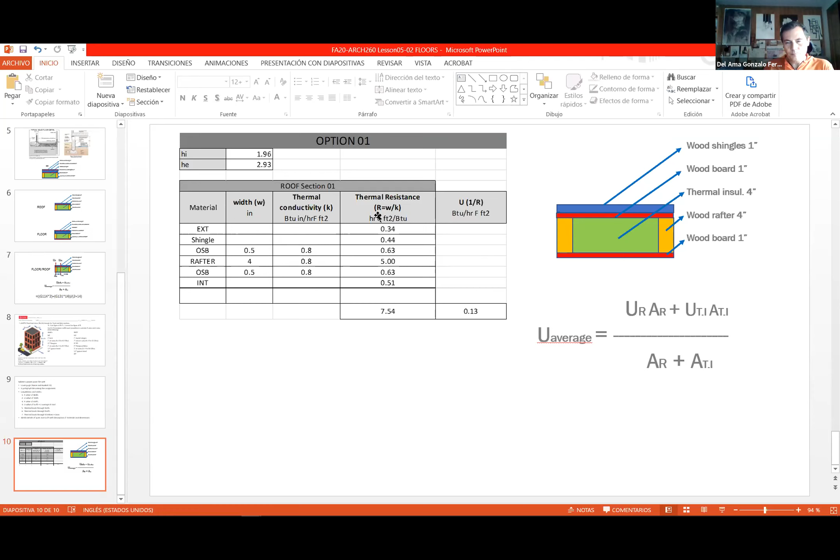We need a table, we need a sketch with materials and thickness, and if you need to calculate the U average, the U average. So I think it's good having a slide for each option that you are defining. You can have a slide for the wall, another slide for the roof, and doors and windows can be on the same slide, I think, because you don't need two of them. And it would be good if you start describing this with your own dimensions.

Okay, so the first slide is the cover page. The second slide should include this, the building. So you can copy and paste that building, but with your numbers here, and you can write a paragraph on that building. So that building is placed in Hartford, Connecticut. The indoor temperature of the building is whatever. The outdoor temperature of the building is whatever. The wall is made of. So here you have all this information, but you need a narrative. I know it doesn't make any sense. Why do I need a narrative if I have all data here?

Because lawyers don't know anything about building science, but they know a lot of narrative. And in the unlikely event that your clients are not happy with your work, and you end up being sued, there will be lawyers, and all this information has to be written so that a lawyer can understand, because they don't understand drawings, they don't understand tables, they understand paragraphs. So we need this, we need a paragraph describing what we have done.